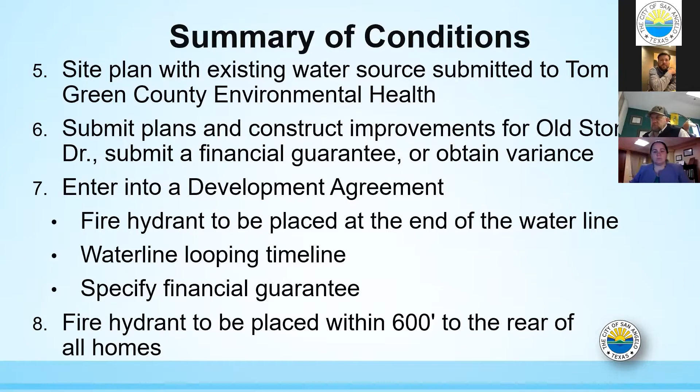With that, are there any questions from Planning Commission? Do we have questions for the staff? All right, we're going to open it up for public comment.

Good morning, Russell with SKG Engineering. We would ask your approval of this item and of the plat as presented. We've specifically drawn the plat this way with Crystal Point Drive being the hammerhead for Old Stone and not taking it all the way to the east and west boundaries of this property, intentionally.

The developer, I guess, this will ultimately turn into a three-section development, with the third section being the completion of Crystal Point Drive to the east and west, and also the lots that would front onto Crystal Point on the south side. So, staff wants us to push and develop Crystal Point to the end.

The developer's real preference would be to develop this lot and land as we presented it. If not, we had an earlier conversation with staff about flexibility, where staff mentioned that with each of the lot 15s there, if we didn't plat each of the lot 15s and instead did a temporary turnaround at the end of Old Stone, that would be a way to do it as well. We just wanted to get to the end and do the hammerhead as a street construction that meets the intent of the fire code.

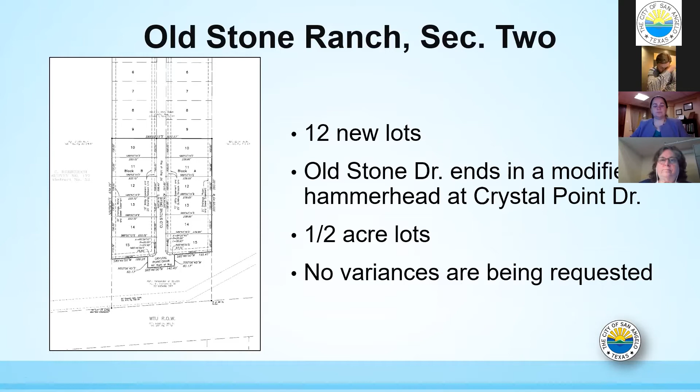I'm assuming if the staff's recommending approval that the fire marshal, the fire department has signed off on this hammerhead plat as it's been laid out. Is that correct?

Mitchell, have y'all discussed the option of a developer's agreement for the remaining Crystal Point? We have, and Public Works was hesitant to accept a developer's agreement just in the case of right-of-way dedication and paving with no financial guarantee or financial backing, such as a bond, cash, or letter of credit. Normally that's stuff we would see on a performance agreement. We were hesitant to accept it in this instance.

This is Shane Kelly, Director of Operations for the city. Another issue I have here is I don't want to end up with another Twin Mountain Drive, where we have a section that's been left out for years and years, and it's just a little bump out that actually starts causing safety issues in the roadway and concerns. That's why I had to go in there and temporarily construct a portion of Twin Mountain Drive, to clean up some of the safety issues involved.

It all depends on how soon things develop along Crystal Point Drive. But if this is not dedicated and that half's not dedicated, you could end up with Crystal Point coming together with basically two chunks out of it. So again, just another situation where we don't want to end up like where Twin Mountain was for years out there.

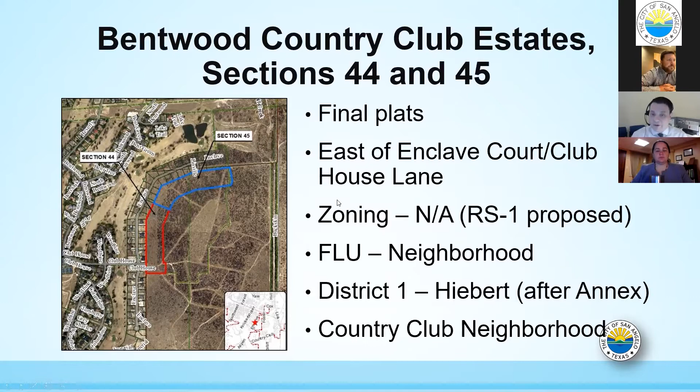This is also RS1 zoned property that's going to second reading at council. This was part of the annexation item and this rezoning that y'all looked at last month. So the zoning will be RS1 by tomorrow if everything goes well, and the future land use is Neighborhood District 1, Tommy Hiebert Country Club.

So this was the approved preliminary plat back in October, and then the areas we're talking about today, the two final plats, were the RS1 zoned areas to be annexed. So somewhere down the road, this area down here will also be annexed, the remaining 49 acres, but not yet. So 44 is 8.051 acres, 33 single family lots, and 45 is 9.595 acres.

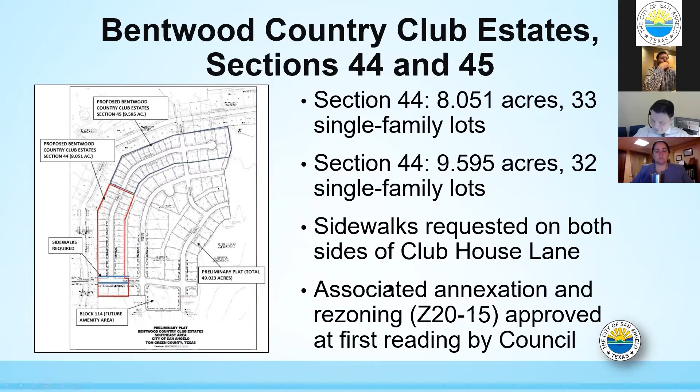We are requesting sidewalks along Clubhouse Lane. We'll go over that in a few minutes, and again, we've talked about this as part of the annexed area. So these are some of the pictures that we've already shared in the previous cases, so I'll go over this quickly. The governing preliminary plat you all approved in October.

The two final plats are identical with the preliminary plat, so it conforms. The neighborhood policies support a diversity and mix of housing choices.

These lots will range from 7,200 to 14,300 square feet. So the lower end, some of the lots, will provide some options there, and then some of the larger lots as you go east. The new streets will meet the minimum construction standards.

Clubhouse, as mentioned, is a collector, so that'll have a 50-foot paving width and a 60-foot right-of-way, and the other local streets will be 40 feet with a 50-foot right-of-way.

We've talked about this before as well with the preliminary plat. There could be a potential future amenity area here. So there's several reasons why we would want the sidewalks. And again, this is just about 300 feet.

So the dark red straight line is what's part of this plat, and then the dotted lines could be the future sidewalk extensions. This could be an amenity area down here, with more homes and people walking.

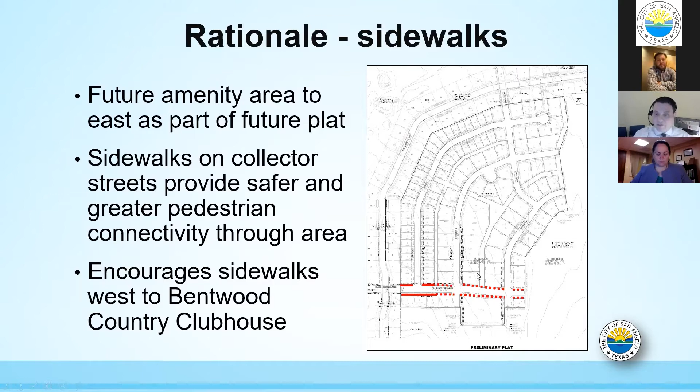We believe that with collector streets, having sidewalks is a good idea and will provide more pedestrian connectivity through the area. We've done this in previous plats. It also encourages more sidewalks in these dotted areas or in other places in the neighborhood.

So staff recommends approval of Bentwood Country Club Estates Section 44, subject to 9 conditions of approval, and approval of Bentwood Country Club Estates Section 45, subject to 8 conditions of approval. I'll go over these quickly.

For Section 44: tax certificate, signatures of the preliminary plat. Some of those lettered lots on there were incorrect, so basically some of the areas in the back that look like alleys might be used also as drainage features, so just label those.

The drainage study is required, install water mains, sewer mains, and prepare and submit plans for approval for Clubhouse Lane or variance, prepare and submit plans for Riviera Lane or variance, and install the fire hydrants.

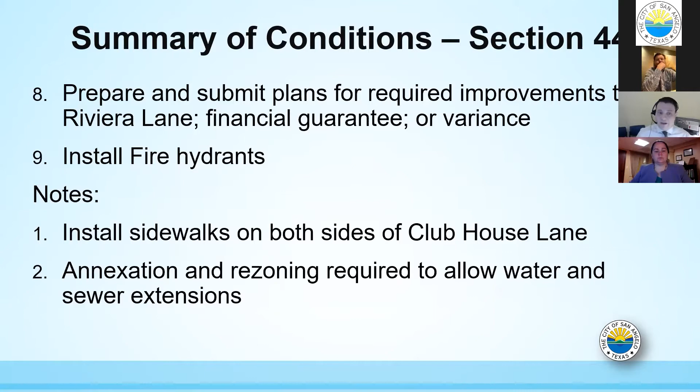A couple notes: we mentioned the sidewalks on both sides of Clubhouse, and the annexation and rezoning, which are going to second reading tomorrow.

For Section 45, it's mostly the same, except that those are not collector streets, so we're not asking for sidewalks there. So it'll just be the 8 conditions: tax certificate, signatures of preliminary plat, drainage study, water and sewer mains, provide and submit plans for Linville Lane, Riviera Lane, and fire hydrants.

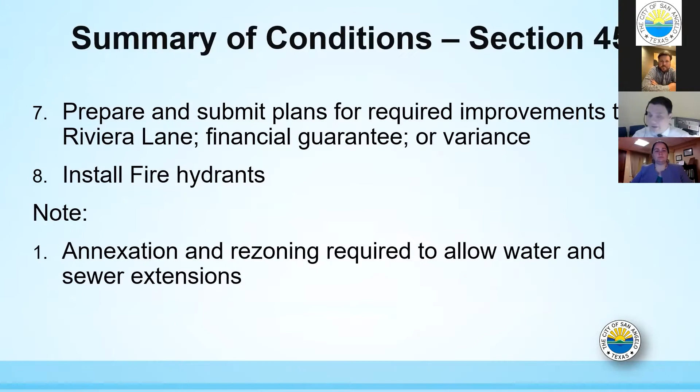So that concludes staff's presentation. I'm going to stop sharing my screen now, and if there's any questions or comments, please go ahead. Anyone have questions for the staff?

All right, I'm going to open it up for public comment. If you wish to speak on this case, please state your name. Good morning, Russell with SKG.

We're not in opposition to really any of the conditions of approval, with the exception of the sidewalks on 2 sides of Clubhouse Lane. The sidewalk issue has been evolving. We've been there, and...

We don't have sidewalks in Bentwood now. With some of these last plats, we do have a sidewalk coming down one side of Wolf Creek. We kind of settled to that.

Bentwood is a golf course community. Golf carts are primarily the mode of transportation. Yeah, there is some walking, but a lot of people use golf carts.

And if you look back at the preliminary plat, between almost kind of in the back of the lots, as Jeff alluded to, those areas are going to kind of double, or be a multi-use area that could be trails, drainage, and even golf cart, walking, hiking, bicycle paths.

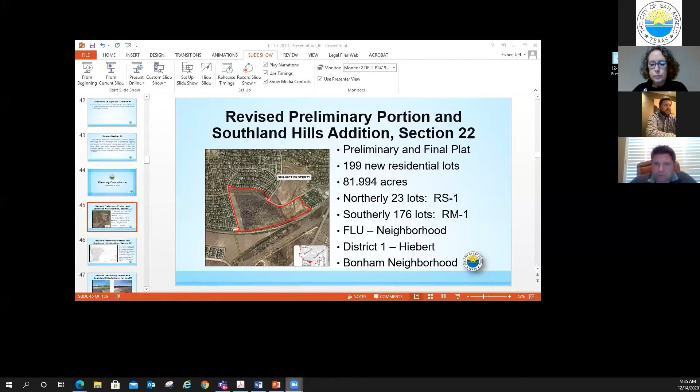Bear with me one moment. I'm going to share my screen again. So there's pluses and minuses to having multiple screens. There it is. Okay, here we go.

Okay, next case, and again we're going to combine them, y'all. This is a revised preliminary plat and a final plat for Southland Hills Addition, Section 22. So the preliminary plat and the final are both for the same area. It's 199. Jeff, hold on. Travis, did you read the preliminary and the final? Go ahead. I'm not sure if I did. I'm so sorry, I didn't want to interrupt.

Yes, okay. Southland Hills Addition, Section 22, a request for approval of a final plat, Southland Hills Addition Section 22, being 81.994 acres located east of Stone Canyon Trail and Valleyview Boulevard, and a variance from Chapter 10.3A.1 of the Land Development and Subdivision Ordinance to maintain a right-of-way of 50 feet in lieu of the required 60 feet, and a variance from Chapter 10.3A.2 to maintain a paving width of 40 feet in lieu of the required 50 feet for the portion of Stone Canyon Trail that is an urban collector street between the northwest corner of the property and Valleyview Boulevard.

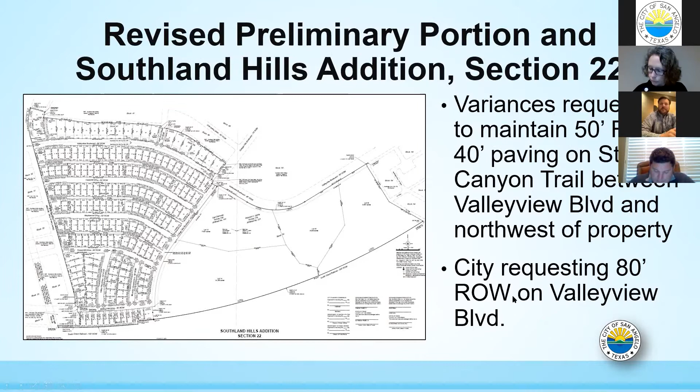There's a small piece of Stone Canyon here that is shown as a collector street, even though it serves and always has served as a local road. So they have requested a variance to allow this to remain at the local street construction standard from here to here, so it'll be a right-of-way variance to maintain 50 feet and a paving variance to maintain 40 feet. The city is requesting 80 feet right-of-way on Valleyview Boulevard in here, and I'll explain that more in a minute.

These are some of the pictures of the area. There will be an associated right-of-way abandonment case for this corner of Valleyview and Southwest we'll discuss later today, and that's basically to acquire the additional land to reduce the right-of-way to 60 feet, as there's that one small corner that's 80 feet right now.

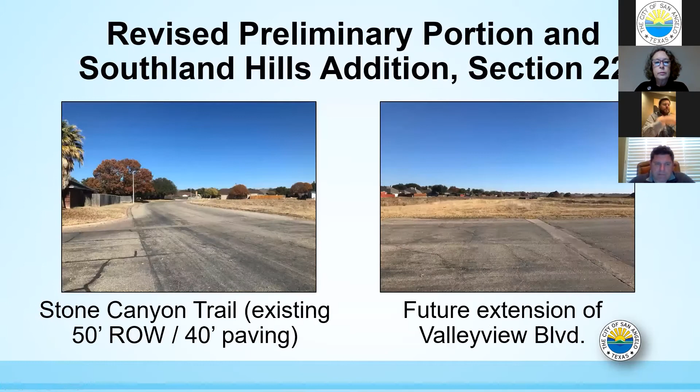So this is Stone Canyon Trail, and this is looking at Valleyview, so it conforms with this new section of the preliminary plat. They amended the old preliminary plat. There was originally a slightly smaller lot, so originally I counted 144 lots. These will be 199 lots with narrower lot widths of 50 to 55. The new preliminary plat and the final will conform with that.

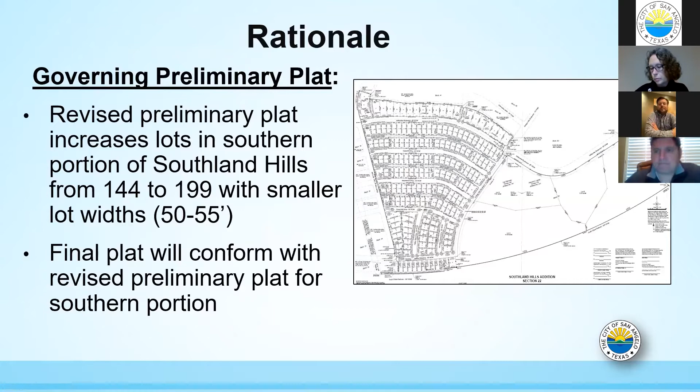The plats conform with the neighborhood policies to support a mix of housing choices, and the new street right-of-ways and paving will comply with the construction standards. There's a lot of internal streets. Obviously this is a very big plat, but all the street standards will comply, with that exception of the variance.

So let's look at the 80-foot right-of-way first on Valleyview and why that's being required. You may have noticed in your staff report that it's designated in our thoroughfare plan as a collector street, so technically it only needs 60. However, it's 80 feet to the west and 80 feet to the east, and I believe it's paved on one side to 80 feet already, so we are not asking for more paving. We're just asking for the additional right-of-way.

That is something that collectively we had discussed with operations and engineering, and basically this would help operations for further maintenance of that right-of-way if they ever need to get in there. Also, if the city down the road—not the developer—ever needs to widen that street in the future, we'd be able to do that. So there is a section in chapter 10.3 of the subdivision ordinance that even if it's designated as a collector, that gives us the authority in those cases. And again, that's up to y'all.

Secondly, on the sidewalks on Valleyview, similar to the previous case, we believe that that's a collector street. This is a really large subdivision, 199 lots, so having some sidewalks there would allow more pedestrian connectivity in the area. Again, our standard policy is to have them on both sides. When you hit College Hills to the east, the subdivision plat boundary is only on the south end as you go east of College Hills. So it's on both sides of Valleyview, and then east of College Hills just on the south side, the portion that's abutting the plat.

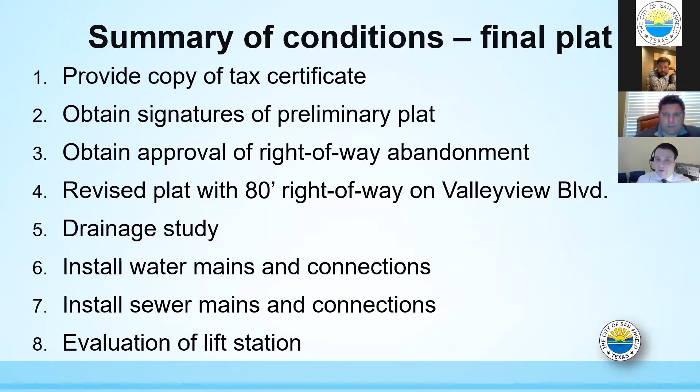And then the final plat, tax certificate, obtain the signatures on the preliminary plat first, which they'll do, obtain approval of a right-of-way abandonment. And that's, again, the plat was based on a 60-foot right-of-way. So if we change that, then that condition might change. Revise the plat with the 80-foot right-of-way, a drainage study, water and sewer mains, an evaluation of a lift station. Engineering can comment more on that if needed. And then prepare and submit plans for all of the streets.

So I'm not going to go over all of these conditions. Just know that with the exception of Valleyview and that portion of Stone Canyon, all of them are going to be local streets. So that's the same thing. They're going to construct them at, I'm assuming, 40 feet, and not going to require a variance on those. Okay, so I'm going to stop sharing my screen, and that concludes our presentation.

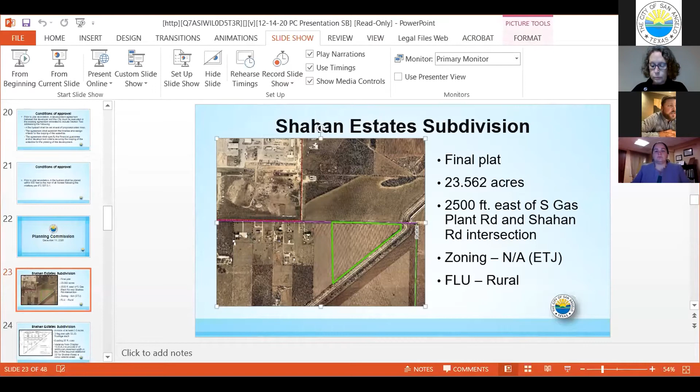Final plat for Shahan Estates subdivision, a request for approval of a final plat for Shahan Estates subdivision, being 23.562 acres located 2,500 feet east of the intersection of South Gas Plant Road and Shahan Road, and a variance from Chapter 10.3A2 of the Land Development Subdivision Ordinance to provide 26 feet pavement width in lieu of the required 42 feet for Shahan Road, a minor arterial street.

This is Sherry Bailey, Principal Planner once again. I've lost my PowerPoint, so I ask that you bear with me for just a minute. No problem. I totally lost it. Hillary, do you happen to have it readily available? I can pull it up real quick, so.

I've got it. I've lost me, so... Can you see what I'm presenting or what I'm showing here? I can see it. Okay, Sherry Bailey, can you see it? No. Okay, as soon as you can, let me know.

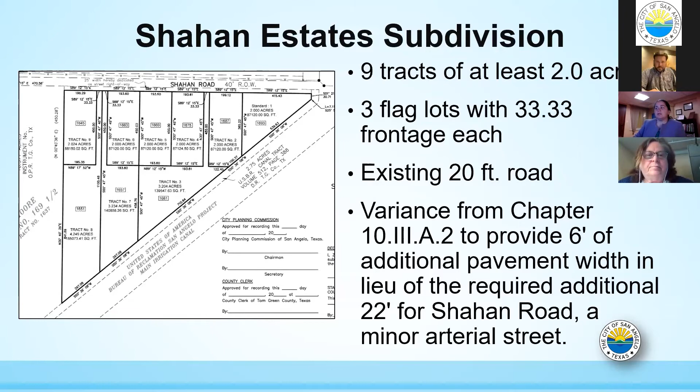They're asking for a variance from the paving width. Shahan Road is actually designated as an arterial, which would require a 64-foot paving width. Currently, with it being 20, they would be required half of the 44, which would be 22. So they are asking to pave 6 feet, making it a minimum 26-foot wide road in lieu of the required 22 feet for the arterial.

Again, she's shown just some pictures here of the existing roadway and kind of ranch farmland at this point. So we are recommending approval of the plat. The plat meets all the regulations. It's rural designation, which reflects these large lots in this neighborhood, and it provides safe development and proper development of land in the ETJ.

So with Chapter 10, staff is not supporting the variance. We're going to go through some of this. Again, we are basing this decision off of the current ordinance, and the ordinance states that any development is required to pave half of the incremental width.

So the subdivision ordinance does say at the time of platting, that's when the roadway improvements are triggered. Staff does understand this is a pretty large section being 22 feet, but again, the subdivision ordinance triggers this with the plat.

With this area evolving, we're not sure that this isn't the time to get these improvements. We don't know if this will spur future development, and allowing the variance now might prohibit that arterial from developing in the future. We see no current hardship.

There's no topographic issues. The master thoroughfare plan states this is a future arterial, so that's what we're basing it off of. And each home might not create significant traffic, but as this area develops out, this road may be needed in the future.

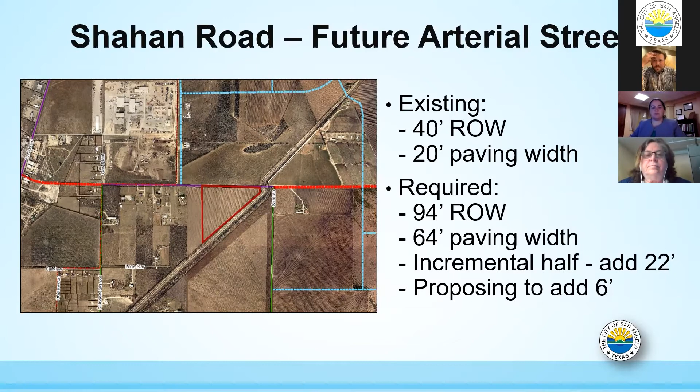So the existing right-of-way is 40 feet. The paving width is 20. They are required 94 feet of right-of-way as a subdivision and 64 feet of pavement. Their incremental half would be 22 feet. They are proposing to add 6. If you can remember, 26 is the minimum for any road anywhere, so they're proposing to add 6 to meet that minimum.

So staff is recommending approval of Shahan Estate subject to 5 conditions, and denial of the variance for the 6 in lieu of the 22. The summary of conditions are a copy of the tax certificate, the drainage study, Shahan Road submit a financial guarantee or get a variance, provide Tom Green County Environmental Health with the septic system plans, and comply with any fire district requirements for the ETJ.

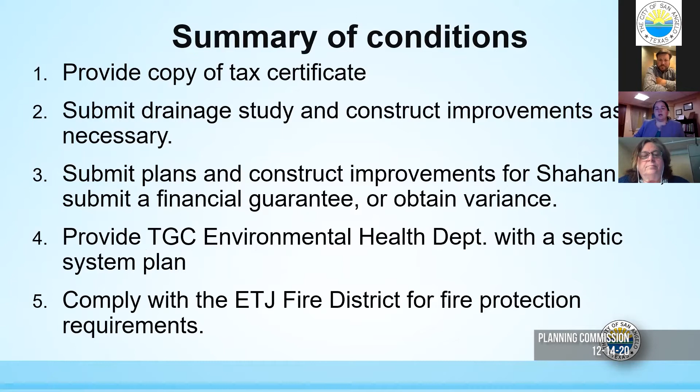Does anyone have any questions?

Anyone have questions for the staff?

Okay, I'm gonna open it up for public comment.

Real quick, the property owner wanted to give his thoughts on it, but I did want to state that we didn't come up with 6 foot on our own. That was proposed to us. We've had many meetings about this, and we only found out last week that they weren't going to support this. So we didn't come up with the 6 foot, that was given to us by some of the staff. I guess it didn't get passed down the line or whatever, but that's kind of where we stand, and how we're trying to rush and get things the way that we need to have them.

So Wes, are you on the line? Yeah, I'm here. Okay, go ahead. Yeah, my name is Wes Quinn. I recently purchased this property with another partner.

I'm going to be building my house on the western portion of this property, and our whole intent was to be able to have 4-H and FFA livestock projects. Where my current subdivision is, they don't allow any of that. For the eastern portion, for this plat, we're wanting to basically have that same feel, that same vision, to have larger properties that will facilitate the 4-H and FFA projects for the youth.

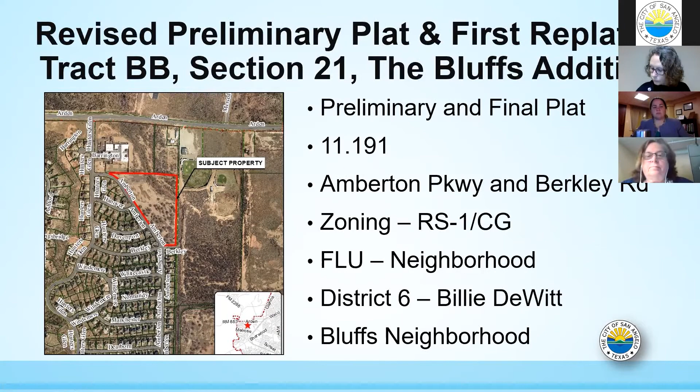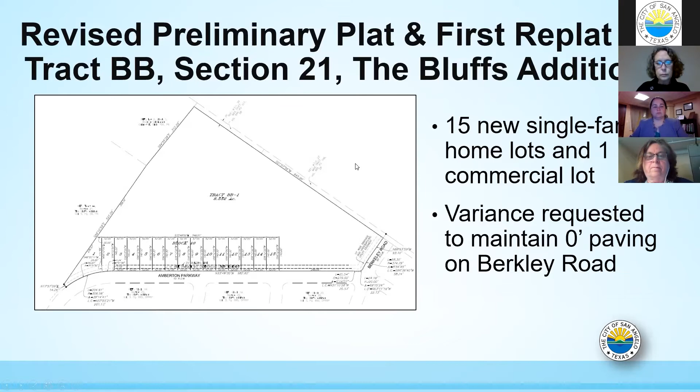This is District 6, Billie DeWitt, in the Bluffs neighborhood. So the 15 new single-family homes, as you can see here, north is to the left of Amberton Parkway. There's a section of Berkley Road which was never developed but shows as a right-of-way. As part of the plat, that's going to trigger the incremental half on Berkley, and the minimum we mentioned earlier today in previous cases is 26 feet. So they're asking, since it's a dead end here and goes into an ASU property, to leave that at 0 feet, and the city's asking for 26 feet on the variance.

So this is looking at where Berkley dead ends. I've talked to ASU. There's no plans right now to develop behind there, but there's always that chance they could sell that land, or they could change their mind. The city might want to have that. So leaving it at 0 feet might just create an issue, and the city would have to come in and pave that. So we're against the variance based on that.

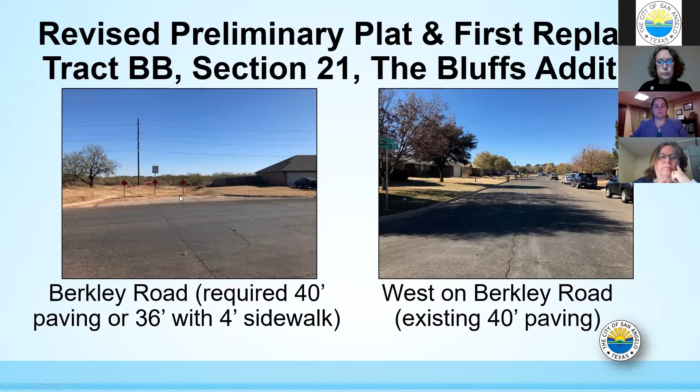Otherwise, no issues. We received one in favor, one Green Star. Because this is a replat and a portion's RS1, we did circulate. Out of the 28 notices, there's one in favor and one against. The one against was actually in support of the plat, and in a sense she's actually in support of the variance too. Her issue was drainage. She doesn't want Berkley to be paved, which is the applicant's position. So she's opposed to improving Berkley, which in essence takes the same side as the applicant. Her concern, I guess, she lives up on Davenport and was just concerned about some drainage, but engineering is here to comment on that if it comes up.

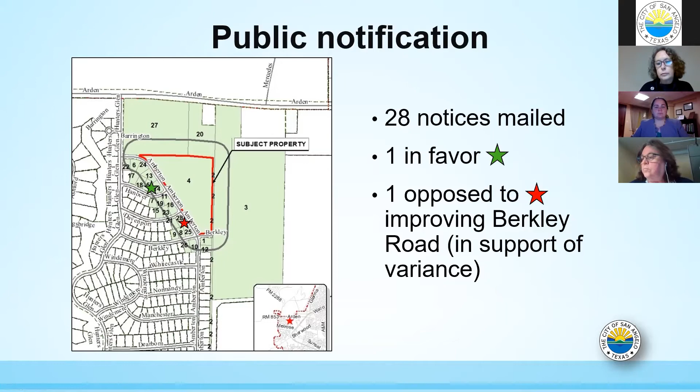But we do have a drainage study as a condition of approval, which is a normal standard and should address that street. The final plat will conform with the revised preliminary plat against the same area we're looking at. The plat conforms with neighborhood policies to support a mix of housing choices. The commercial lot in the back is not consistent with the neighborhood designation, but it was already zoned CG before, so we believe in general it conforms. The intent and purpose statements - Amberton already has existing sufficient right-of-way and paving width. Again, the only issue is the street width on Berkley, which was never developed.

So we are recommending denial on the variance for Berkley, just given that there is that potential one day that it could be developed to the east. If we miss that opportunity, again, the city would have to come in and do that. Dead-end streets are not unique to the city - we have a lot of dead-end streets. We've had some cases today where they're required to pave to the end or provide a hammerhead, so this wouldn't be any different. There wouldn't be any hardship in the sense all the streets in the area are already fully paved with curb and gutter, and those developers have done that with their subdivisions. This would be the only piece left that wouldn't be. Again, for general safety, when lots develop adjacent to a street, having that required paving width for fire and public safety is important.

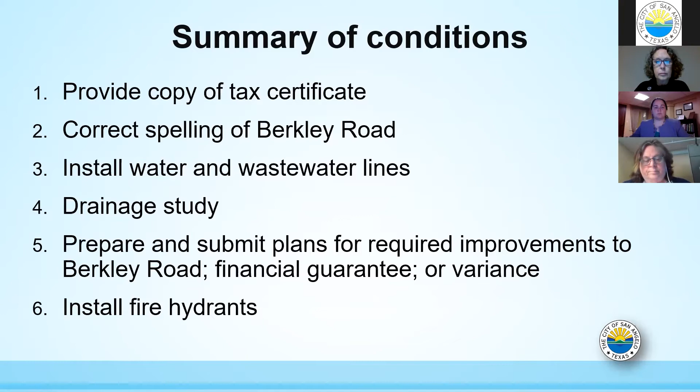So that was the tax certificate. Correcting the spelling on Berkeley Road, it should just be BERKLEY. Installing the water and wastewater lines, a drainage study, preparing and submitting plans for the required improvements of Berkley or the financial guarantee or the variance, and installing the fire hydrants. Just some notes, there may be some additional floodplain requirements - again, that east part of the lot that's zoned commercial is in the portion of the floodway.

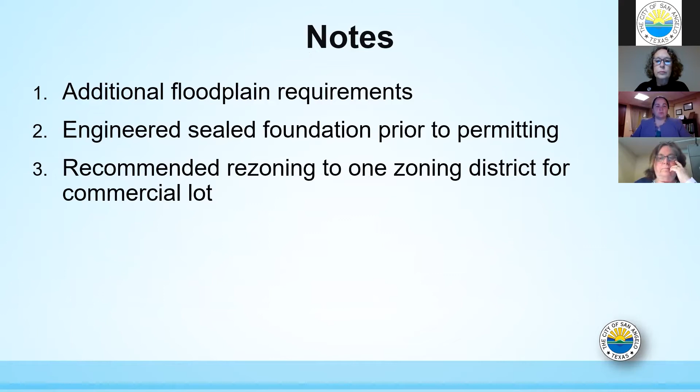Engineered sealed foundation prior to permitting, and staff recommended rezoning to one zoning district for the commercial lot. Just that front part is RS1, the back is commercial. So if they ever put a small retail plaza in there, you've got potentially some compatibility issues with that piece in the front, depending on where they're locating their buildings. But again, that's up to the applicant.

This concludes staff's presentation. Any questions or comments?

Well, and I'd like to add something if you'd allow me, Ms. Jackson. So let me talk about the reason for denial of variance from the staff perspective. We are approving a preliminary plat, and they are right now proposing to add the homes and not do anything with the commercial lot. That was their proposal today. So our suggestion was final plat the residential lots and leave the big commercial lot preliminarily platted.

Again, we're approving that today, and then we will defer the requirements for Berkeley for another day, because I don't think it needs to be paved today. There's nothing that it connects to. But at the same time, if we are final platting that commercial tract, now is the time to get the road. So if we final plat it today and give them a zero-foot variance, and all of a sudden we develop homes or businesses to the east, now that developer and/or the city is going to have the obligation when it should have fallen on this section of the bluffs.

So I hope everyone understands the way staff was looking at it. If we're okay with approving the preliminary plat and final platting the residential lots, that's great. My concern was if we final plat the commercial, have a buildable lot there, and don't do Berkeley with that at the same time, then we run into problems later.

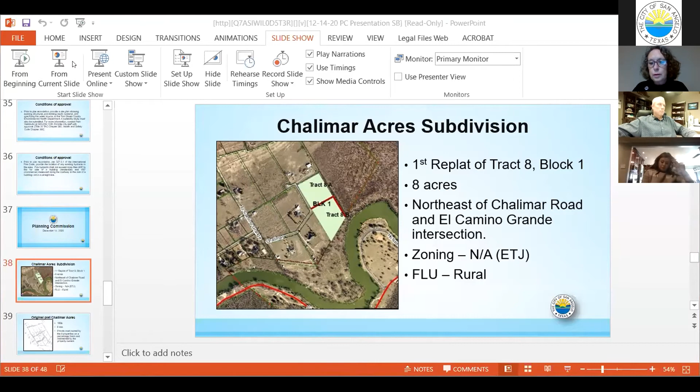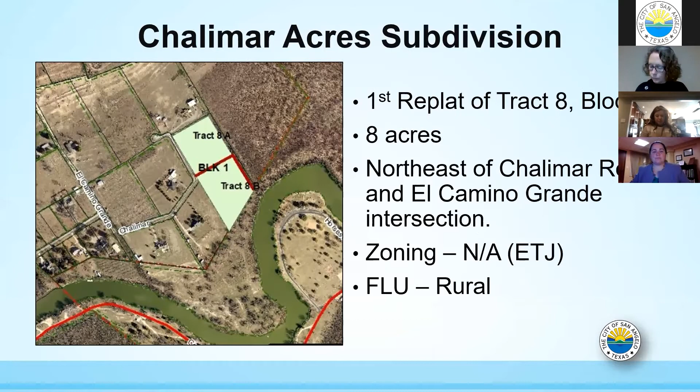This is the first replat of Tract 8, Block 1. It's an 8-acre tract located northeast of Chalimar Road. There is no zoning because this is in the extraterritorial jurisdiction, the ETJ, but the future land use for this area has it designated as rural.

If you go out on the road, it's larger towards this side of the area, and then it starts to taper down as you get in towards the end and the cul-de-sac at the very end of Chalimar.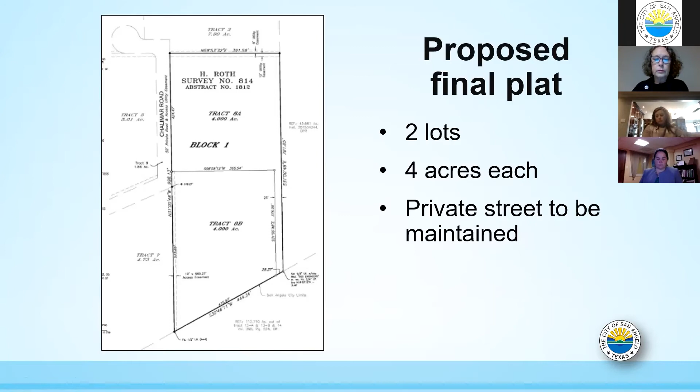We sent out 7 notices on November 25th, and then, I forgot, late Friday and again on Saturday, we ended up receiving a number of notices. There are 2 that are within the 200 feet, and the remaining notices are outside of that 200 feet. I called and talked to 2 people. One was under the misunderstanding that a large number of lots were actually going to be developed on this tract, and they were extremely concerned, as was everybody who sent in the petition, about the water in this area given that number of lots. I told them that only 2 4-acre lots were being proposed, and they seemed to be okay with that. The other person simply did not want the division of the 8-acre tract into the 2 4-acre tracts.

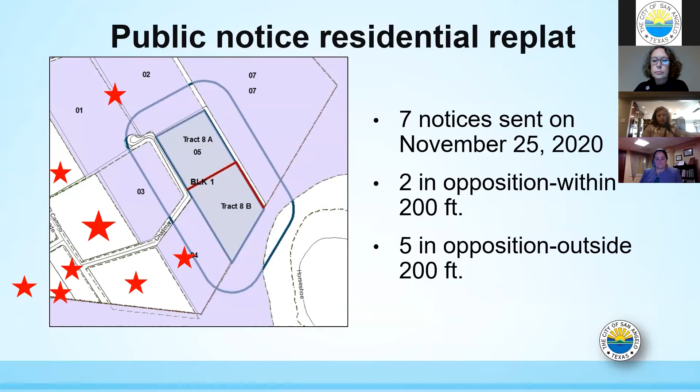The rationale for approval of the plat before you is that the future land use in this area is designated rural. The 2 4-acre lots being proposed are consistent with rural standards, particularly since they're both beyond wells and septic systems, so they would be restricted in size anyway. The existing deed allows only division down to 2 1/4-acre lots, and this 4-acre size certainly complies with that. As for conformity with intent and purpose statements, the plat will provide for the orderly, safe, and efficient development of the city. Platting is encouraged at all times, particularly in the ETJ, and it provides a systematic and accurate record of land development.

Where we run into a problem, and why staff is recommending provision for the private road, requiring it to come into compliance with city standards, is that according to the subdivision ordinance, we cannot allow development of any lots that are not on a developed and public street. In this case, the private road, although it has functioned well in the past and has been kept up, does not meet the city subdivision ordinance requirement for public street access.

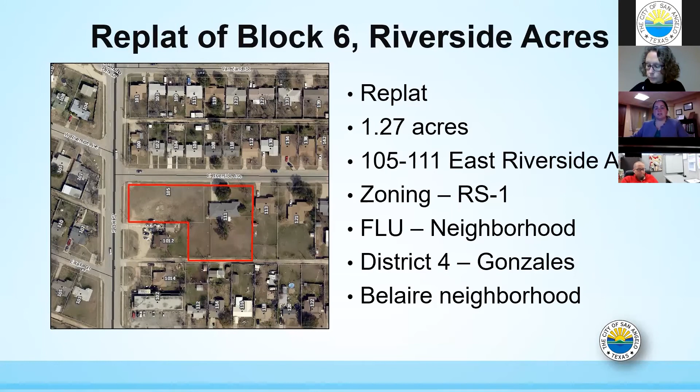All right, good morning Planning Commission, this will be my first case. Again, Hillary Bucher, Planning Manager for the City of San Angelo. We are looking at the replat of Block 6, Riverside Acres, a replat of a little over an acre, 1.27 acres. It is currently addressed 105 through 111 East Riverside. If the plat's approved, those addresses will minorly change. The current zoning is RS1 with a future land use of neighborhood. It's in SMD number 4, Lucy Gonzales's district, in the Belaire neighborhood.

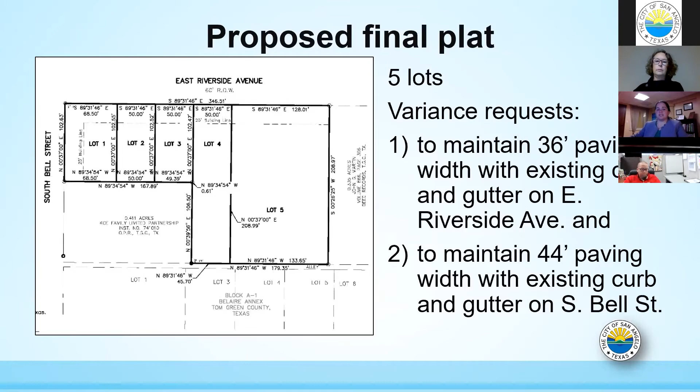So they're proposing to add basically 5 lots total; there were 2 currently, so they'll be adding 3. There are variance requests to maintain 36 feet of paving width on East Riverside Avenue, designated as a collector on the current master thoroughfare plan, and to maintain 44 feet of paving width on South Bell Street. The plat itself does conform to the comprehensive plan. The RS1 zoning is consistent with the neighborhood, as this is really a continuation of the existing development over there—there's a lot of single family homes in that area.

It also will provide for orderly, safe, and efficient development of the city, and will provide streets that ensure safe and convenient circulation. So let's talk about the two variances from Chapter 10.3A2, which are the paving width variances. Staff is actually recommending approval on both for different reasons: the current streets meet the need of the area, and adding 4 additional homes will not significantly increase the traffic. South Bell Street was improved to its current width, I believe in 2012—I'll have to go back and look at the exact dates.

But here recently, the city was actually the one that determined that width. So that's the reason we've supported variances on South Bell Street. Also, this section of East Riverside, although it's a collector on the master thoroughfare plan, is very much developed out.

As we look through these, I'll show you some pictures and you can see that this development will not significantly increase that. These streets are within a fully developed area and maintain the same widths adjacent to the plat. The streets serve the area, currently have curb and gutter, and 4 homes will not increase the strain on these streets. This width is sufficient and will not pose a safety risk.

So again, this is the area of Riverside. You can see all homes all around it. This is the subject property that you're seeing on the left-hand side picture. It is on the right. You can see the current home is being remodeled. The right picture is looking back toward Bell Street. So very nice, has been recently retopped. You can see, even though it's 36 feet, it's very wide and can accommodate parking as you go along.

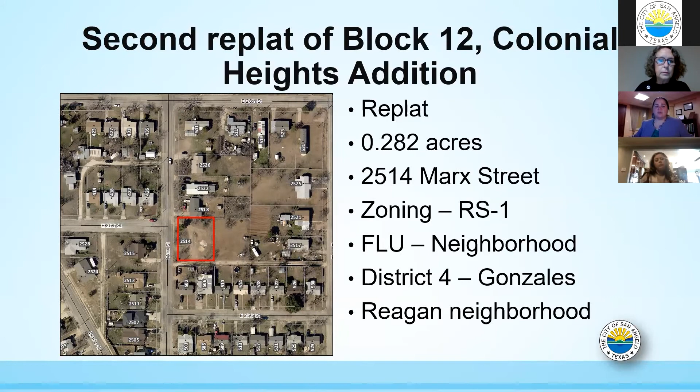The current zoning is RS1, and the future land use is neighborhood. Again, we are in SMD number 4, Lucy Gonzales's district, in the Reagan neighborhood. This is a proposed final plat, and they're actually creating 2 lots here. It's a good infill project.

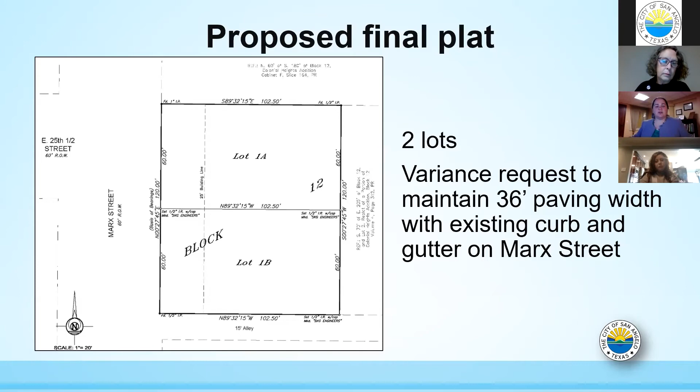They are requesting a variance to maintain a 36-foot paving width with existing curb and gutter on Marx. This plat does conform. It is RS1 zoning, which is consistent with the neighborhood future land use, and it's a continuation of the existing development. The plat provides for orderly, safe, and efficient development of the city, with streets that are safe, convenient, and functional for circulation.

So again, we are recommending approval of the Chapter 10 variance. The current road meets the needs of the area. We're only adding 2 new homes, so that will not significantly increase traffic. The streets are within a fully developed area and maintain the same widths adjacent to the plat. They serve the area, currently have curb and gutters, so 2 homes will not create strain on the streets, and the width is sufficient and poses no safety risk.

This is just an image of the area. As you can see, the street looks like it's been overlaid recently, and you've got good curb and gutter. In the left-hand photo, your subject property is actually on the right; on the right-hand photo, it's to the left. You can see I even have the little city car parked there, but there's significant paving width.

Staff is recommending approval of the second replat of Block 12, Colonial Heights Addition, and approval of the variance request from 10382 to maintain a 36-foot paving width on Marx, subject to 3 conditions: a copy of the tax cert, improving Marx or submitting a financial guarantee, or getting the variance they've requested, and installing water and sewer service lines to each lot.

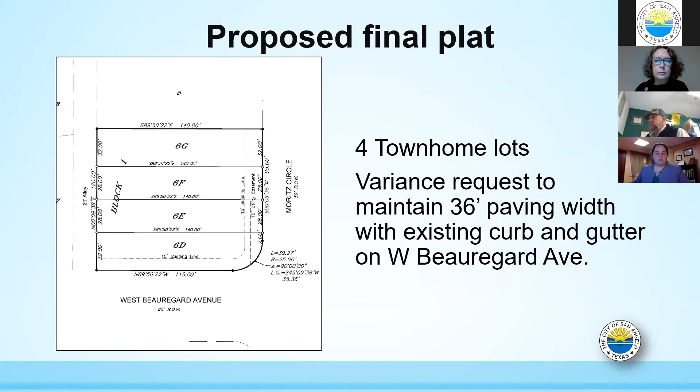This is RM1 zoning, which is consistent with the neighborhood future land use. The development will act as a transition from the commercial - if you put this in perspective, HEB is to the east, which has some commercial development, and RS1 residential is to the west. This will provide for orderly, safe, and efficient development, with streets that ensure safe and convenient functional pedestrian and vehicular circulation. Again, Moritz Circle is actually 36 foot wide, but they're going to put a sidewalk on that one, so this variance is strictly for West Beauregard.

Again, the street meets the needs of the area.

We're adding 4 new homes, which should not increase the traffic significantly. They are within a fully developed area and the same widths. The streets serve the area. Again, 4 new homes will not create a significant amount of new traffic, and the width does not pose a safety risk.

So these are just some pictures I took of West Beauregard there. You can see it's a very nice road, got curb and gutter. The picture on the right is actually the subject property, and you can see the homes directly adjacent.

So staff is recommending approval of the replat of lots 6A, 6B, 6C in Block 1 of the revised Claremore Heights Addition, and approval of the variance from Chapter 10382 to maintain a 36-foot wide pavement width for West Beauregard, subject to 3 conditions.

We need a copy of the tax certificate. We need to improve Moritz Circle, financial guarantee, or submit a variance. Again, they have agreed to do the sidewalk, which is a great asset for this area, and then submit the improvements for West Beauregard, financial guarantee, or a variance, and they have asked for a variance on West Beauregard. So with that, I will stop sharing my screen and ask for questions.

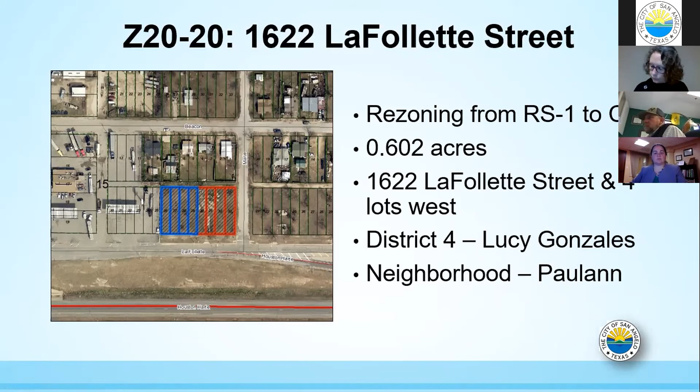And we are proposing to rezone from RS1 to CG. As you can see, it is RS1, and in the future land use, it is proposed to be commercial.

I did send out 15 notifications. I did not receive any in favor nor opposition.

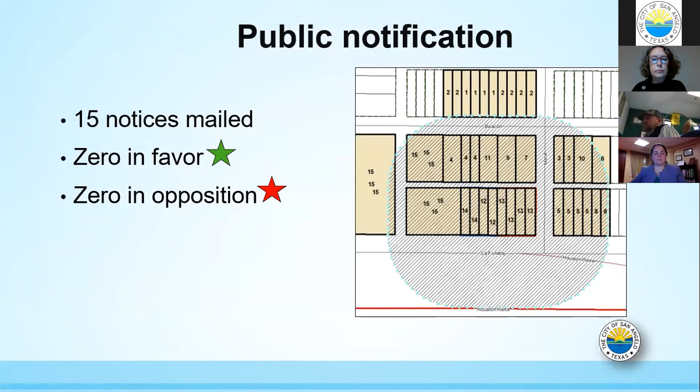We do believe it's compatible with the plans and policies. The proposed general commercial is consistent with the commercial and future land use. One of the goals is to create single-use centers centering around large retail and office clusters visible from major frontage roads, which Houston Hart is a large street in our town. The subject property directly fronts onto this access road of the loop.

We do believe that it's consistent with the zoning ordinance. The combined lots exceed the 6,000 square feet required for general commercial. Currently the property is vacant, and it would allow new development to come in. They would have to meet the standards of that zoning ordinance, including setbacks and regulations regarding abutting a residential use.

It is compatible with the surrounding area. This area is both commercial and residential, so it would extend the development pattern for this area. These properties have been zoned residential since before the construction of Houston Hart Expressway. Before that freeway was built, this area could have been suitable for residential. However, since the addition of that freeway, it does change the character of these properties and the surrounding properties.

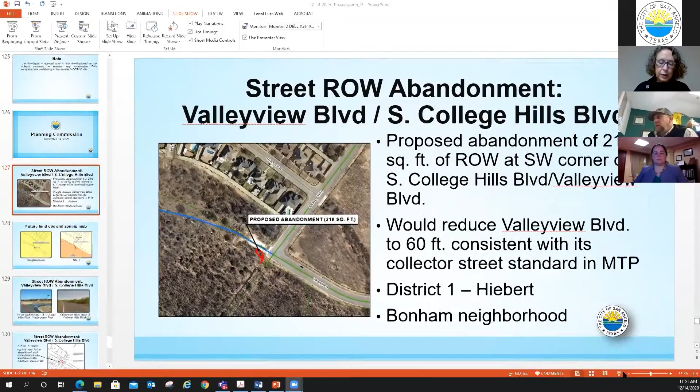Now we're going to right-of-way abandonments. City Council has final authority for approval of right-of-way abandonments. Street right-of-way abandonment, South College Hills, Valleyview Boulevard. A request to approve the abandonment of approximately 218 square feet, which is 0.005 acre of a street right-of-way out of the southwest corner of the South College Hills Boulevard and Valleyview Boulevard intersection.

It's kind of tricky to read. Thank you, Vice Chair Jackson and Planning Commissioners. I'll try to hustle through this. I know we appreciate everybody's patience today, we've had a lot of cases. So this is a follow-up to the Southland Hills preliminary and final plat you all just looked at.

In order for that plat to go forward, they wanted to acquire this corner of right-of-way, which would basically be merged into that last lot, thereby allowing a 60-foot right-of-way. That would go against the decision we had looked at, or staff's position of having the 80 feet. So this would basically allow them to acquire the additional land for that one lot on the corner. It's 218 square feet.

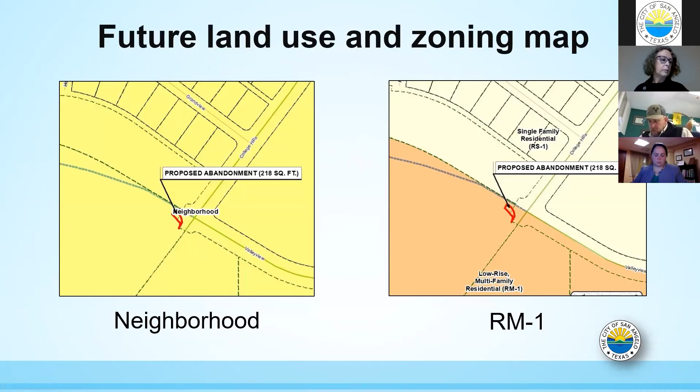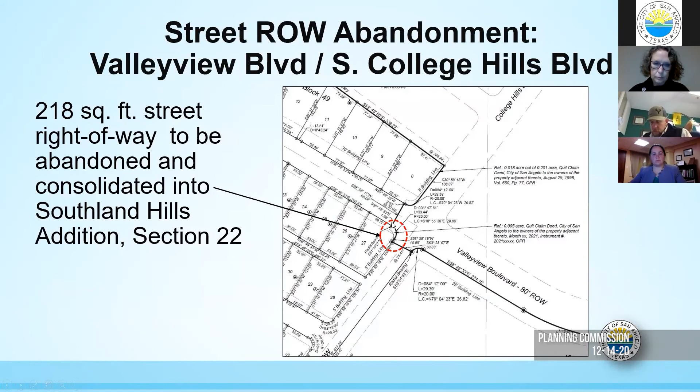This is a good picture of it here, a zoom in of that plat, the 218 square feet. This would basically be acquired and merged into lot 27, thereby narrowing the right-of-way to 60 feet. Staff is against this. To be consistent with the plat, we want the 80 feet of right-of-way for the reasons operations Mr. Kelton had mentioned. So therefore, we would recommend denial as submitted, based on that.

We did circulate all relevant municipal departments, public and private utility companies. We didn't receive any objections from those utility companies. Again, the only issue is the fact that we wanted Valleyview to stay 80 feet. Same reasons, I won't go over this again. Operations and engineering recommended the 80 feet for those reasons. Traffic patterns, Valleyview Boulevard is already 80 feet wide to the west and east. There's no utilities in the right-of-way, but again, the right-of-way itself is the issue.

That could lead to a potential negative community impact without acquiring the right-of-way, because we've got that irregular right-of-way of 60 feet when everything to the west and east is 80. We believe there'd be a greater public benefit by having that additional right-of-way. So staff recommends denial of the street right-of-way abandonment of 218 square feet out of the southwest corner of South College Hills Boulevard and Valleyview Boulevard. That concludes the presentation.

To clarify, we wrote this recommendation and staff report when staff was still recommending the 80. So staff in general is still supportive of the 80 feet, but now it's up to you. You've already allowed the plat at 60, and this would be a portion of that. So that's for your discussion beyond this point.

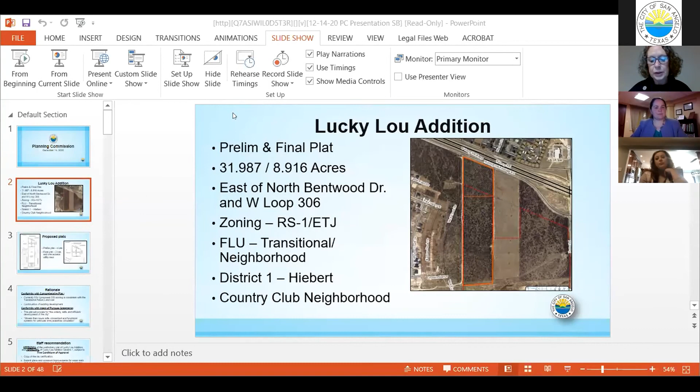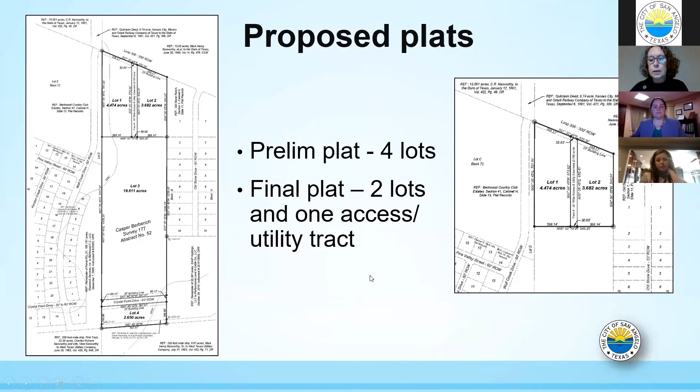Excuse me, Hillary, I have a question. Yeah, no, sorry to interrupt. Lucky Lou zoning, is that not on this one? No, ma'am. Or do we have? Yeah, it'll come next month. We have a timeline. Yes, no, I'm sorry, that's okay. All we're going to do now is just show them the possible.

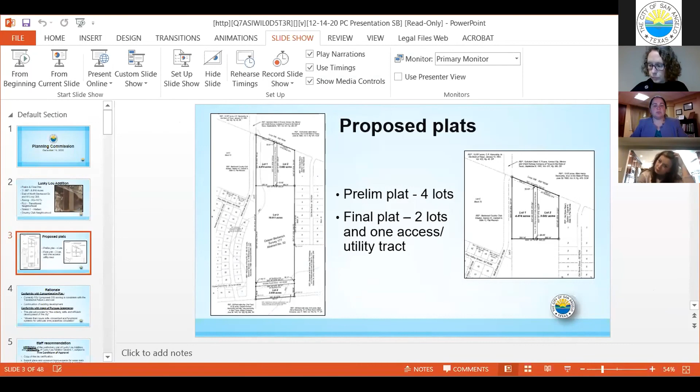So there's actually only a little over an acre that is proposed to come into the city. Again, this goes to city council. We always just like to give you guys a heads up on what's coming, so that way you're aware of it. Part of this, and I think Sherry's trying to find her slides, but part of this proposed plat would be outside the city limit. Oh, there it goes. Okay, Sherry, you want to continue?

We can't hear you, Sherry. I can do it. It's okay, Sherry.

So again, it's just simply to give the planning commission a heads up of what will be going to council. You've already seen the preliminary and the final plat. As Erica alluded to, you will see a rezoning at your January meeting. So this annexation will go to city council for accepting of the petition tomorrow, and then it will go to first reading of the ordinance for annexation in February. Second reading will be the end of March to fall in line with the rezoning.

So we have a timeline. By the end of March, we will have this property hopefully annexed and rezoned to general commercial. So if anyone has any questions on that, please let us know.

It's actually 1.9 acres. Thank you. I couldn't remember the exact acreage. Okay, so just under 2. Yes, ma'am. Thank you, ladies. Any questions or discussion on this from the commission?